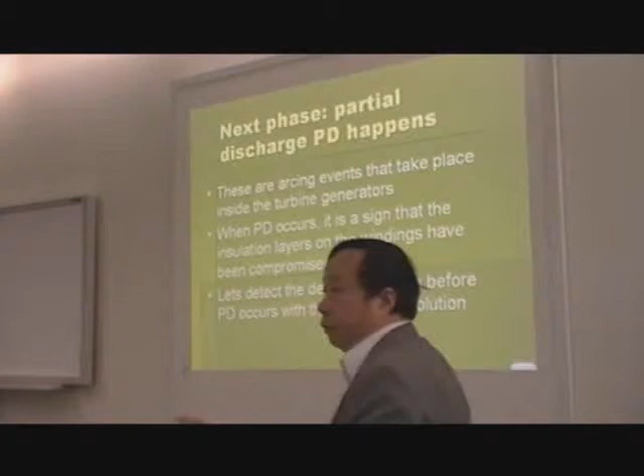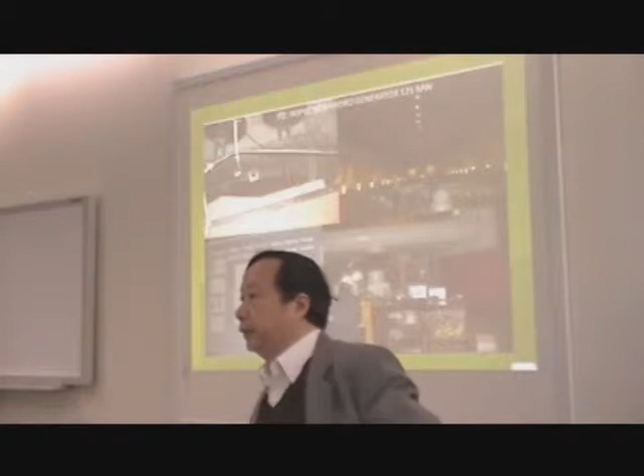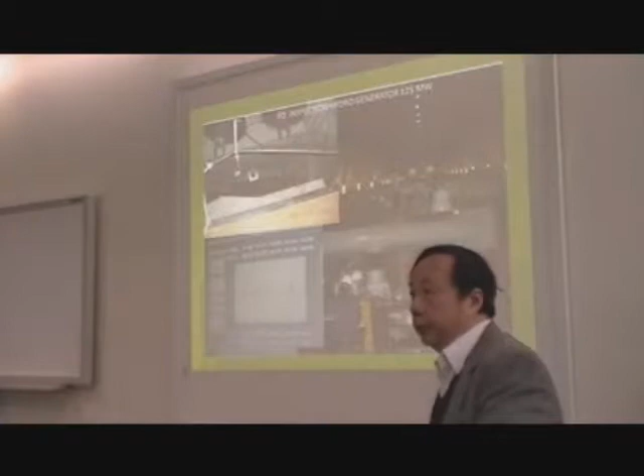So now you will probably ask, well, partial discharge equipment exists already. They have been around for 25 years, so why not do PD measurement? Well, PD measurements are very complicated, and it's a black art. You buy it and you hook up for life with these guys, and only they can help you interpret the data.

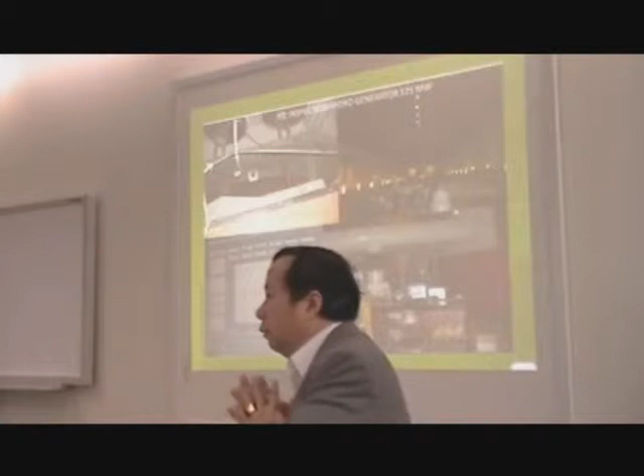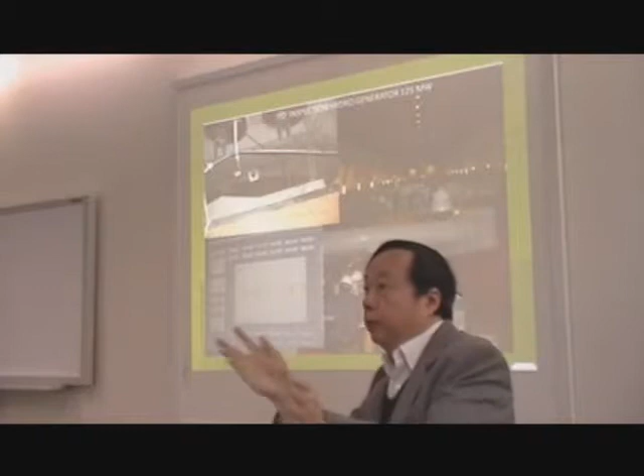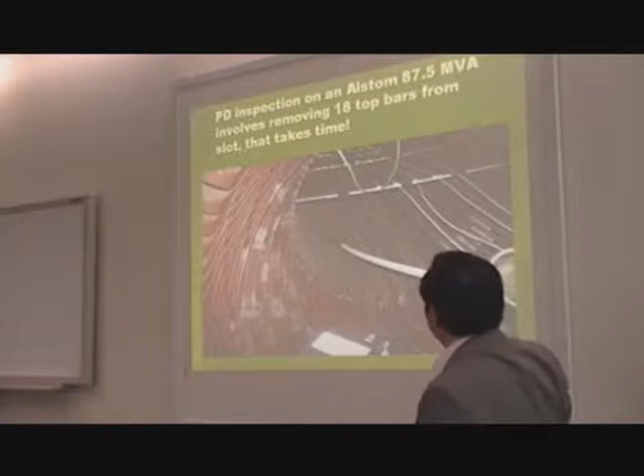So what we want to do is make it easy. Well, you understand temperature, right? You understand hotspots. These are common sense ideas that everybody can take a look at and say, this is the problem. Now, PD measurement can also be tedious. Sometimes you have to wedge an antenna, remove the top bars, and that will take a long time. It's not something so simple.

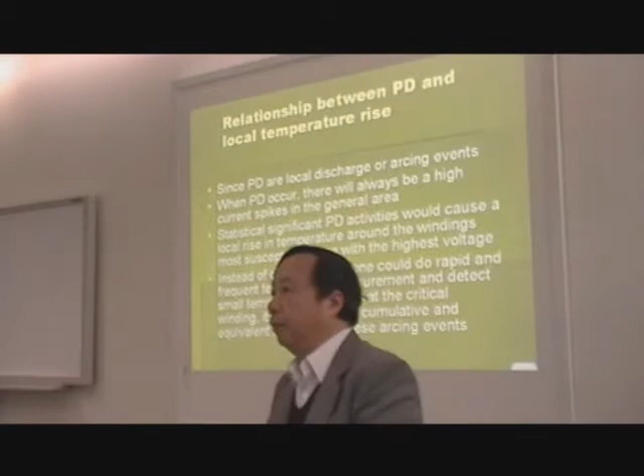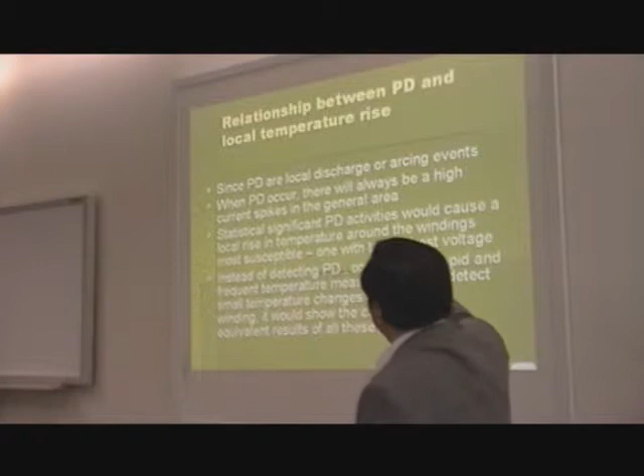And here comes our hypothesis. So what can you do to monitor PD activity without using PD measurement? The physical phenomenon is this: if this is PD, these are arcing events, and then you see...

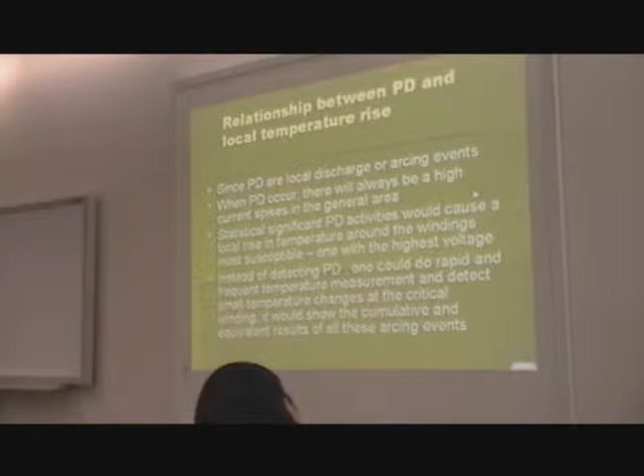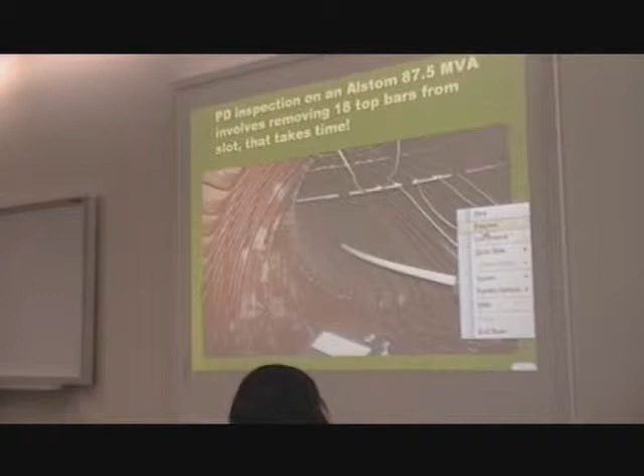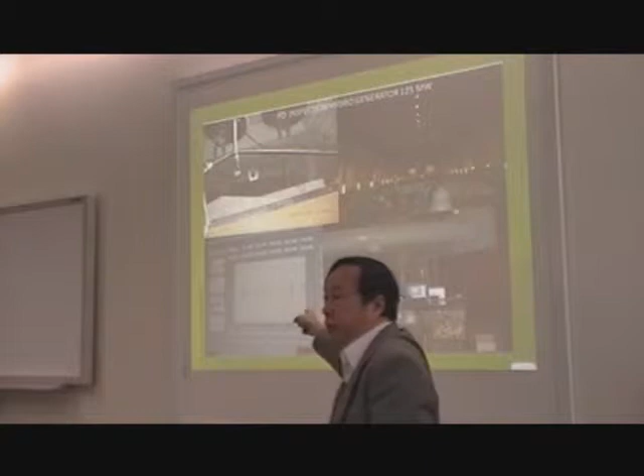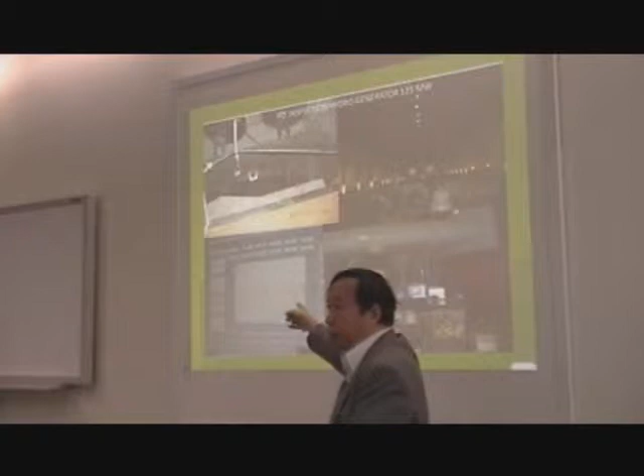You see the lower left-hand corner, and in a cycle there could be clusters of these. Rather than seeing the dot pattern and trying to interpret it, we say that if this discharge did take place, then there should be a local temperature rise in that vicinity as monitored by the sensor. And so that is what we provide.

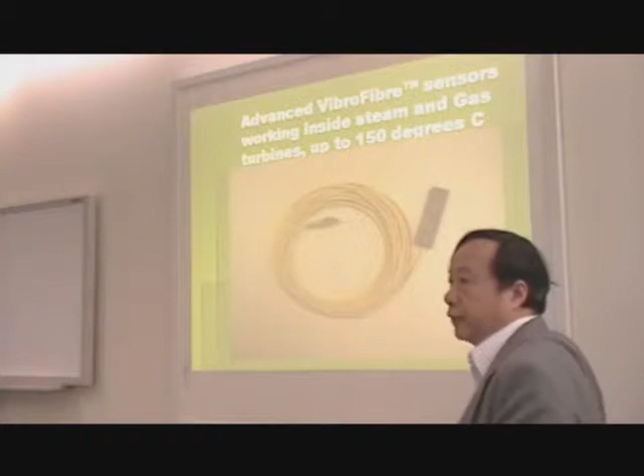With this advanced VibroFibre sensor, first you notice there's a difference in color. It's made with material that can stand up to 250 degrees C. So it is, because if we want to measure temperature, these hot spots...

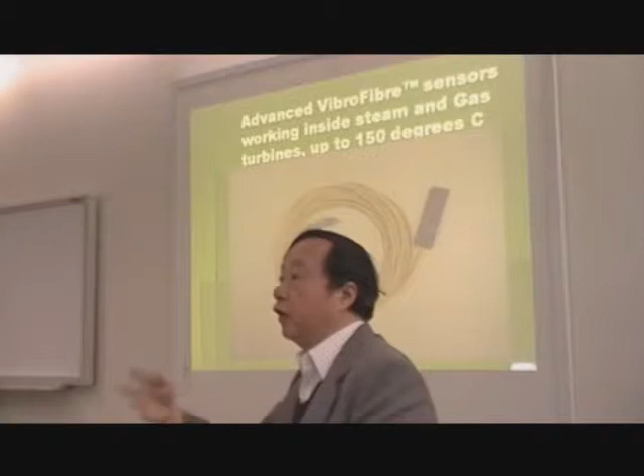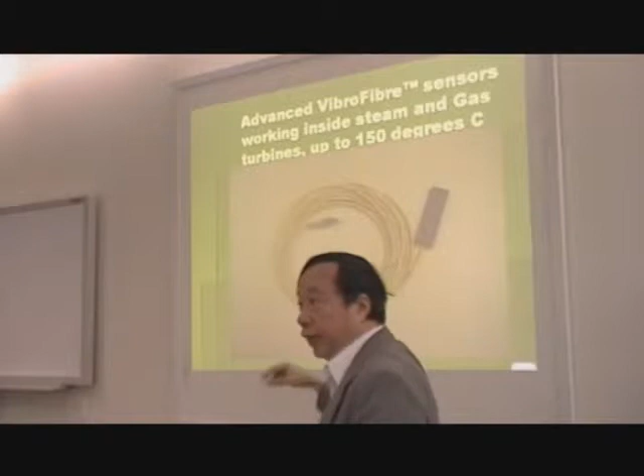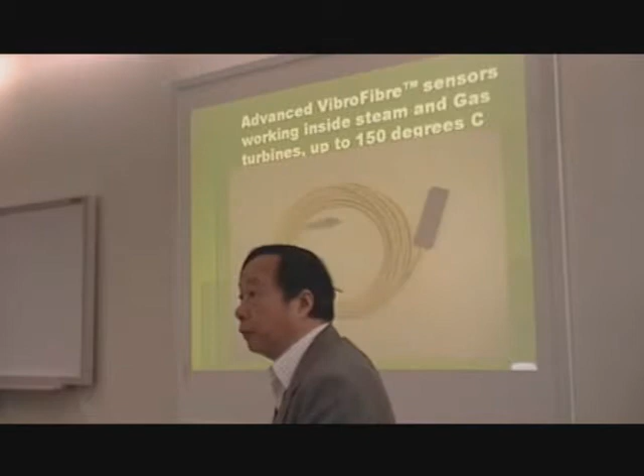Let's say you have a large generator that is hydrogen cooled, with water cooling jackets on the end winding. So you don't expect the overall temperature to rise beyond 100, but locally, remember the Tata hydro turbine caught fire? So it did get beyond 100 degrees. Our sensor can tolerate spikes of very high temperature, 250.

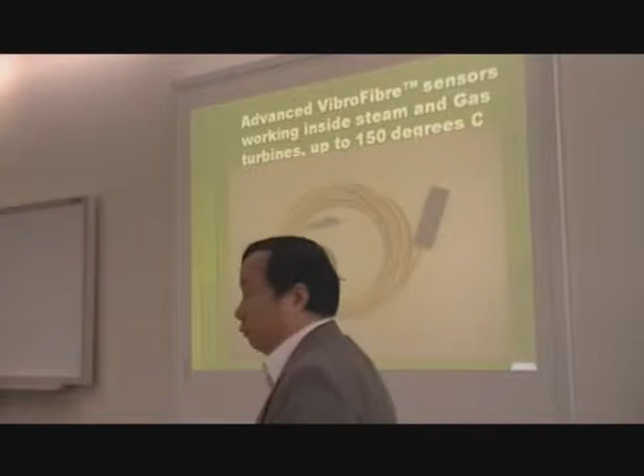Now, of course, to lead up to a fire, you probably have temperature even higher than that. But we want to catch it, maybe shut down before that occurs.

So at this stage, our solution consists of mounting on the end winding, shown here in the cross section, and then in addition, placing it at the same winding closer to the edges of where the rotor and the stator interface. This is the only gap that we can access.

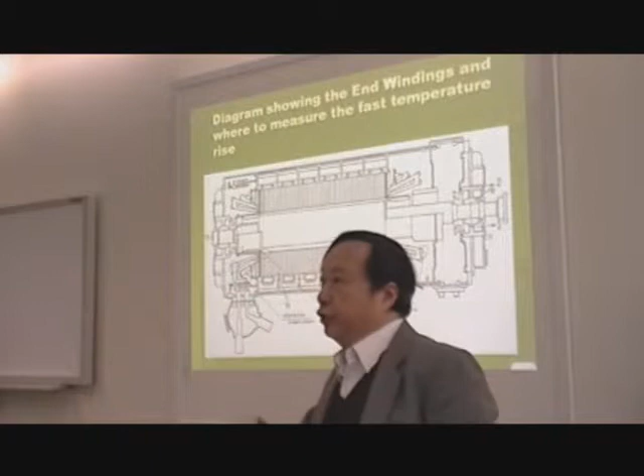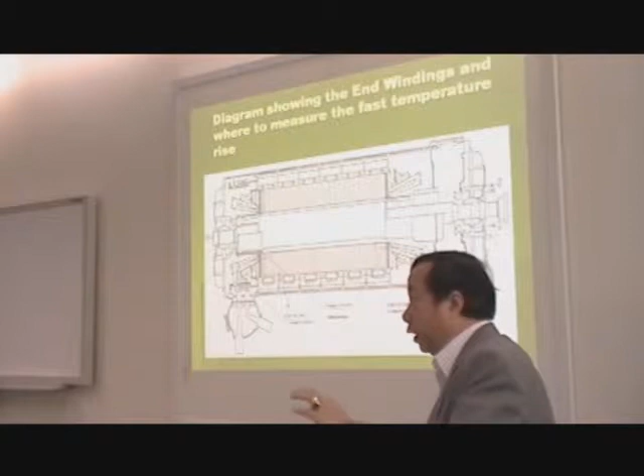Now, we are working on a next solution called stator guard. Remember that one fiber can carry 30 sensors? Well, this one, however, requires removing the rotor to install. But this thing can be lined up to all the stator bars, the rails, and be able to tell you directly whether things are tight, called the stator guard.

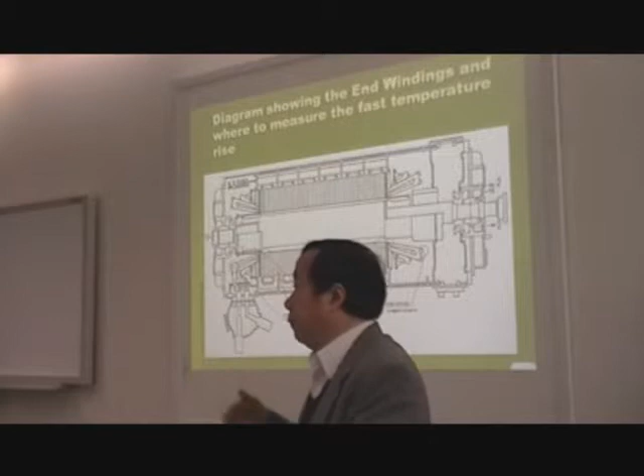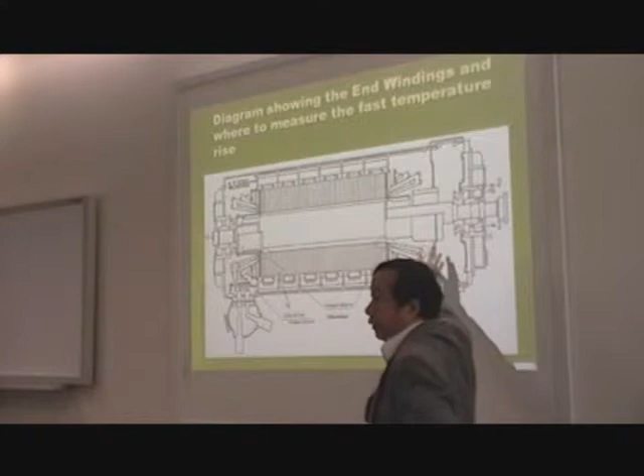And another product can also measure vibration right at the stator. The end winding is actually just an indicator, it's a mechanical amplifier. The vibration starts at the stator core and then gets amplified at the end winding because things are not supported.

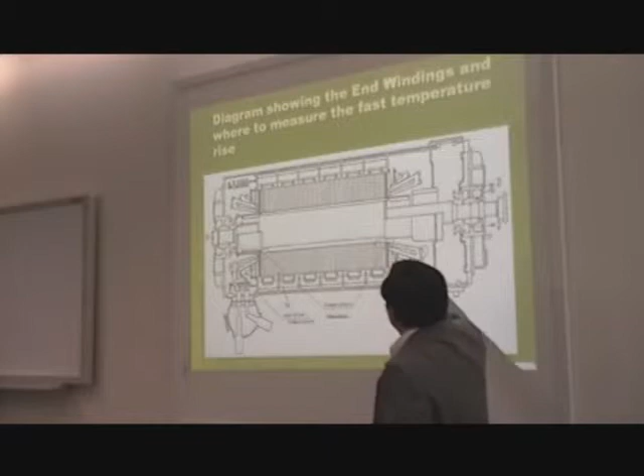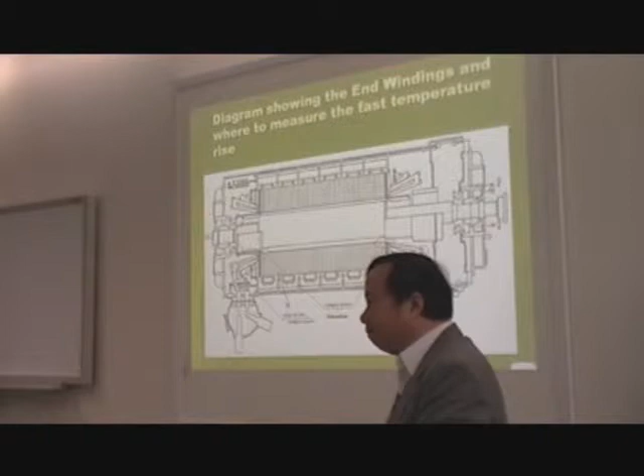Several generators are notorious about this. They didn't know when they designed it. So they are Mitsubishi, Alstom, and Siemens. That's where the vibration becomes very obvious.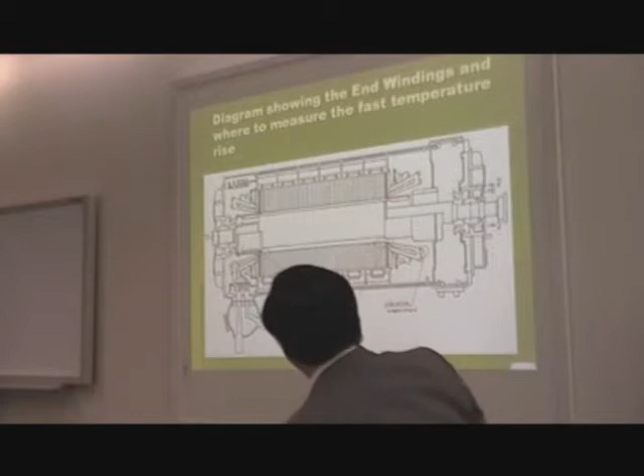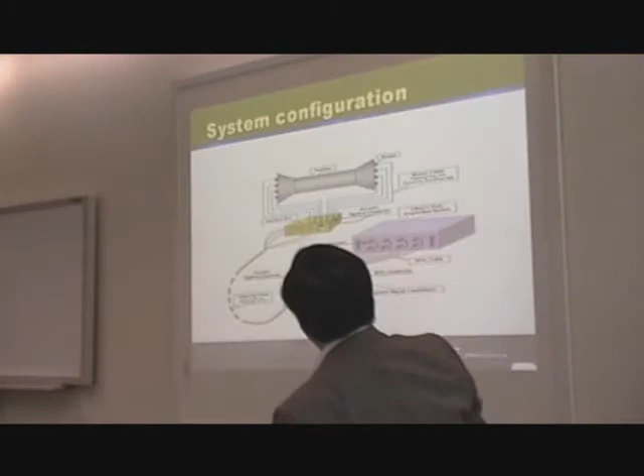So beyond the end caps, and these are the locations that we recommend. So far, any questions?

So how many of those would be inside the generator? Okay, you're getting to that, good question. Remember we said there's a tangential and a radial position. And for a typical three-phase machine, you have 6 free pairs on each end, exciter end and turbine end.

So typically you've got 12. Now, we make it 12 for the OEM because they don't need any more. They said they don't need that. However, our TG guard has 16, allowing you to use 4 extra sensors where you want to measure temperature rise as well.

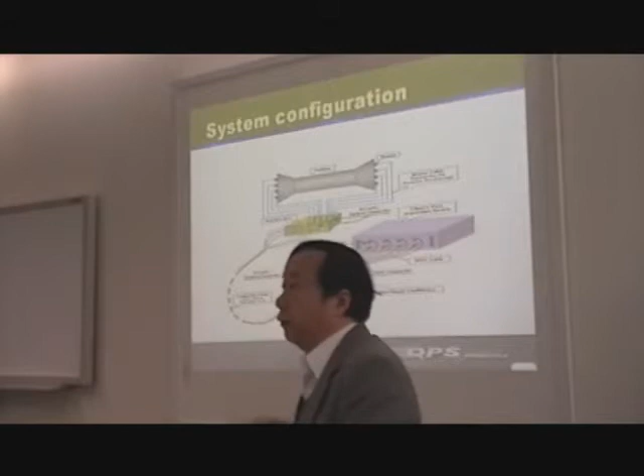Now, the thing is, temperature rise at the end winding is important because that's what Tata found out. But temperature rise should be detected earlier, inside the core. So we recommend 6 on each side plus extra, making 16 total.

Well, the advantage of our solution is that we simplify the architecture. And one thing is that there is a hub.

If it's hydro, then it's a simple junction box acting like a distributor to the sensors inside the generator. If you have a hydrogen-cooled machine, then we provide you with a hermetically sealed junction block. Outside of that junction block are terminals that are color-coded, and this color-coded fiber optic cable can go up to 100 to 300 meters away.

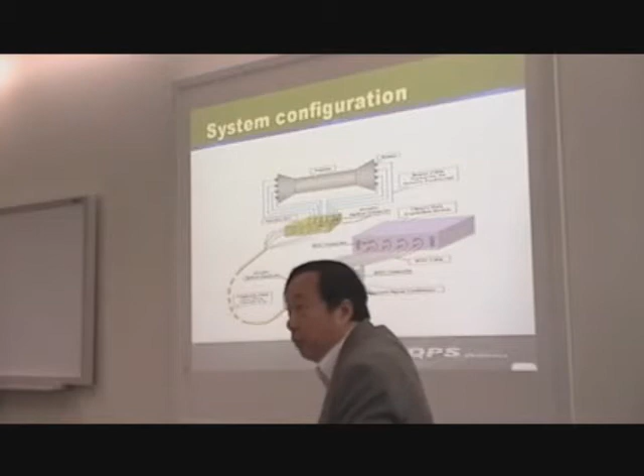This is the significant difference between optical solutions and electrical solutions. Electrical cables cannot be long, they pick up noise along the way. Whereas this technology, which telecom actually uses, goes up to 20, 30, 40 kilometers. So when I say 300 meters, I am being conservative. So it can be done like that.

Essentially, then the composite cable breaks out again, linking up to our box. Our box provides the light source, then does signal conditioning, and interprets the result.

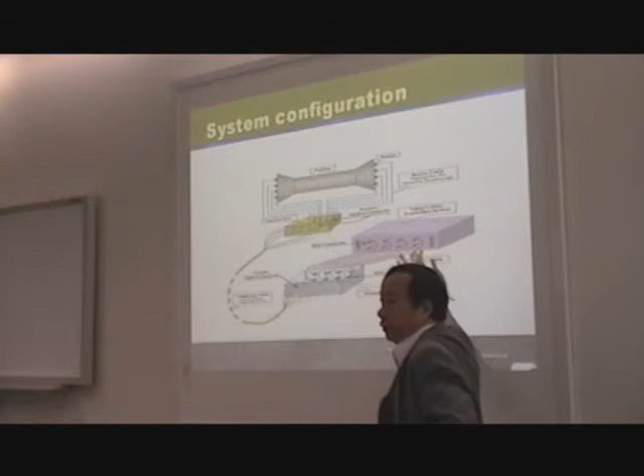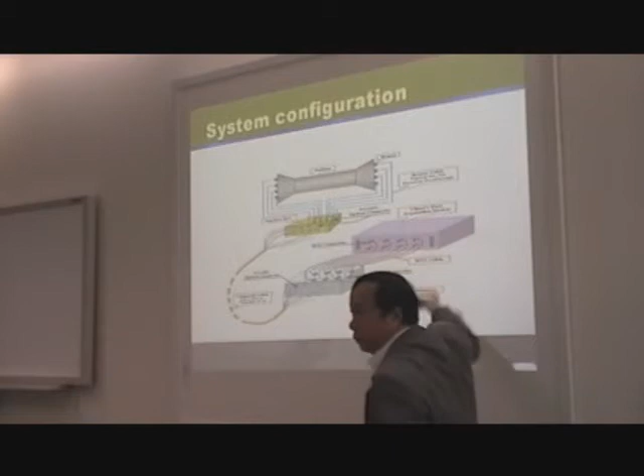And this is the picture for the OEM where they have their own data acquisition unit. We output analog voltages directly fed to them. For TG guard, our machine takes it off and gives you the direct signal, which I'm going to show.

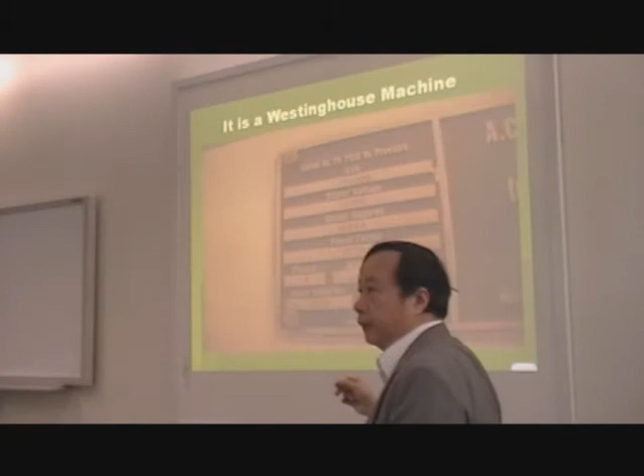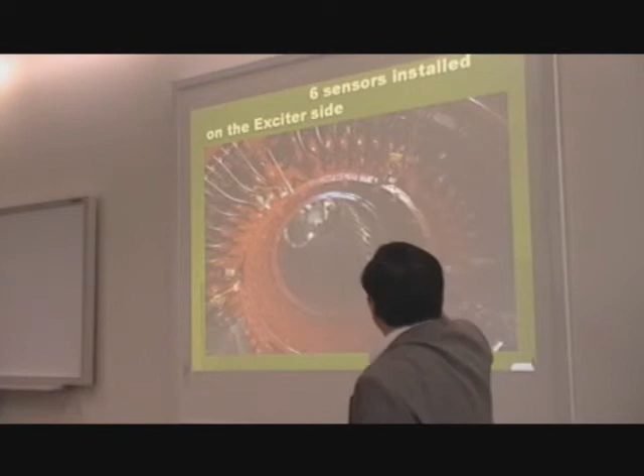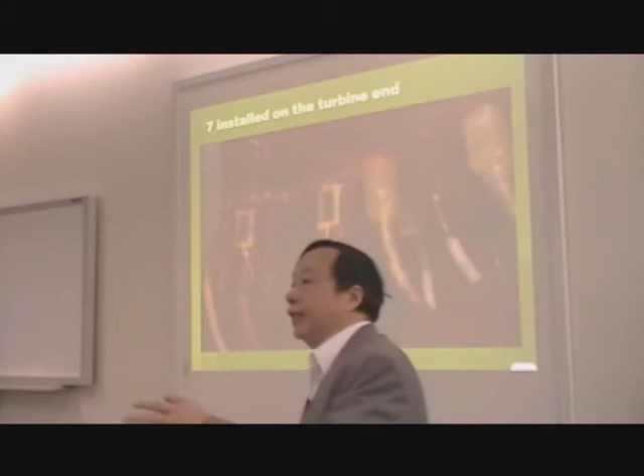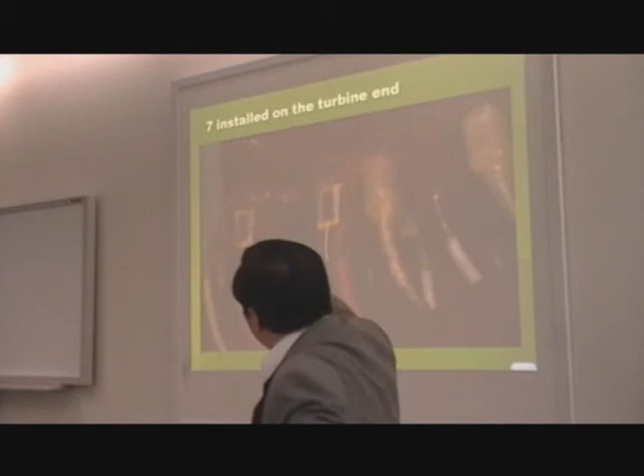And on the other side, instead of 6, there are 7, because the 7th sensor was made to mount directly on copper. The customer wanted to try an experiment just to check temperature, because the winding had been wrapped. So if the sensor is mounted on top of the wrapping, we are concerned about the thermal conductance of that insulating layer.

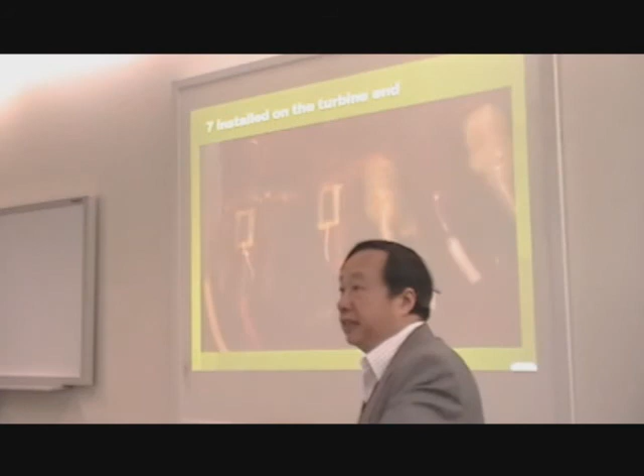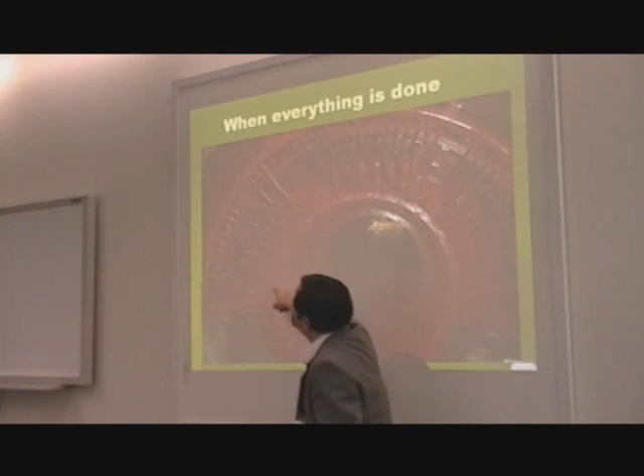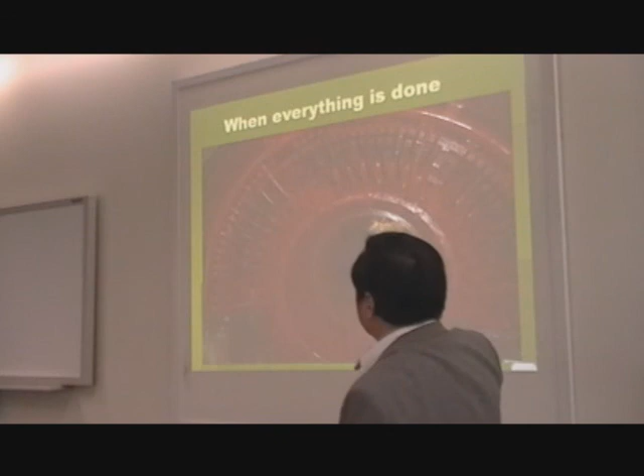So by the time we finish, you can hardly see them, except there's a little dark shadow here, well, I can barely see it. These are where the sensors are. After we finish installing them, we wrap them, we paint them, and so it's completely transparent.